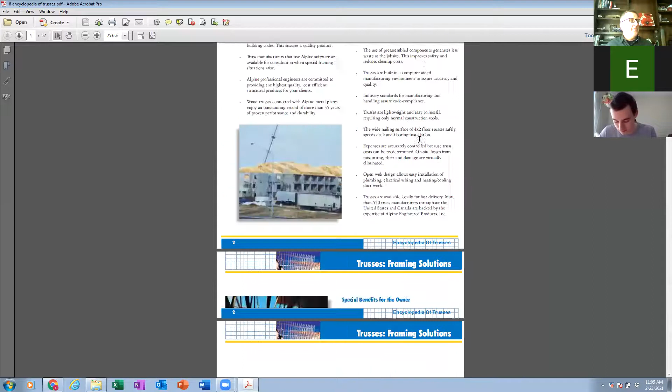I've mentioned a thousand times that I draw house plans, etc., and one of the things I'm doing a lot is speccing out trusses. I'm not an engineer, so I can't design the trusses, but I'd like you to understand exactly what that means. In My Open Math I actually posted this Encyclopedia of Trusses. It's a PDF document you can search yourself online and download. I'm not going to go into a ton of detail, which irritates the snot out of me because it's so dang cool, but I'd like you to at least look at this page, because it's kind of awesome.

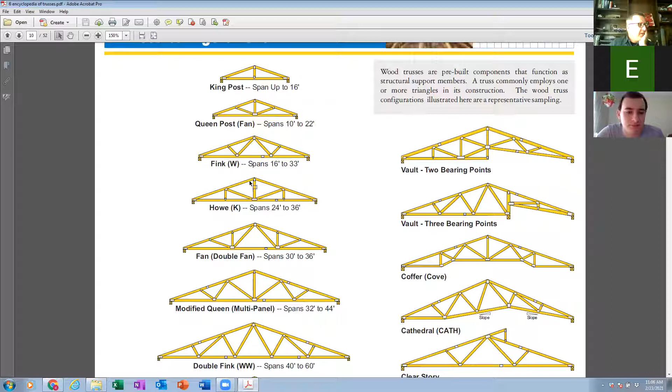So we're going to start looking at this today. And as I said before, the cool thing is you don't have to learn anything new—you already know this. We have to make the sum of the forces in X, Y, and the sum of the moments equal zero. But the brilliance of a truss—let's take a look at this Howe truss. And notice these names: Fink W truss—notice that makes sense, there's a W there. And a Howe K truss—maybe those look like a K somehow. I'm not seeing a K right now, but maybe there's a K right there. Fink and Howe—let's see, are there any other names here? I thought there were three.

There's one more I can't think of, but Fink and Howe were people who lived in this country. Back when bridges started, it was time to get serious, because people invented the iron horse, the train. Now if you're going to get one of those across a river, you're not just going to fell a tree and walk over it like they would with a wagon train—throw some sticks over a couple of trees and get the wagon across. You're going to have to get really serious about how to build a bridge if you want a train to be able to cross. These names were the last names of train engineers. I'd invite you, for some extra credit, since I haven't looked into it any more than what I just told you, to go investigate: who were these people, when did they live, and what they really did is come up with these web designs.

So I'd like you to understand a little more about trusses and what's in your book. Take a look at this—this one on the top right here, let me zoom in a little bit more.

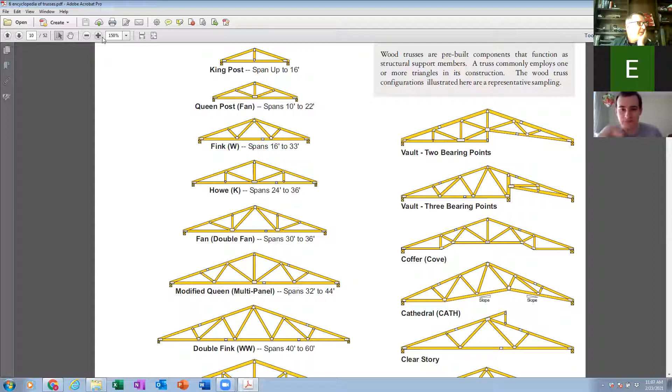This on the top right here is called the top chord. So those are two top chords. And then there's a bottom chord.

This is what you experience as the roof on the outside of the house, and this is what you experience as the ceiling on the inside. But what you never see is what's called the web inside this, which is just a bunch of sticks, and all together that actually supports the weight of the roof. It's just super brilliant.

You might notice there's a bunch of plates on here, and those are really cool. It's like a piece of metal that has teeth that push through it, so there's all these teeth sticking out. They lay them on both sides of the truss and just smash them in there with this huge roller. It's really cool how it holds these together.

The end result is these are engineered, and we're going to have a project about this a little bit later on. But what we want to talk about today is the forces that are acting on all these things, and try to understand it.

So, you tell me, what actually causes all the forces? Notice there's no arrows pointing at this saying 9 newtons or whatever. What causes there to be force on that roof? I'd like you to brainstorm with me a little bit here. Where do the forces come from that are acting on this—the arrows that your author is always adding to your pictures?

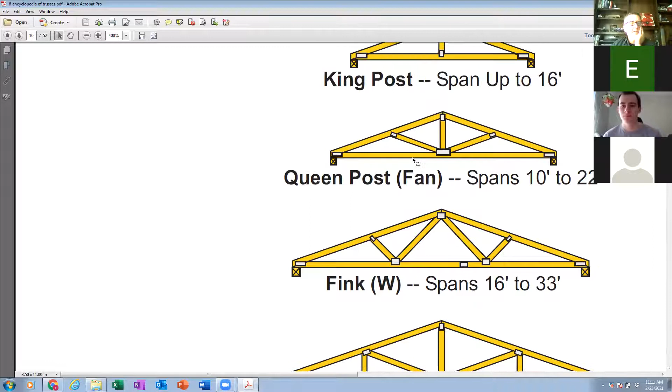So we're going to get into that, which again is beyond the scope of this class, but I just think it's so cool. I want you to understand this so you can be awesome in your future classes in engineering.

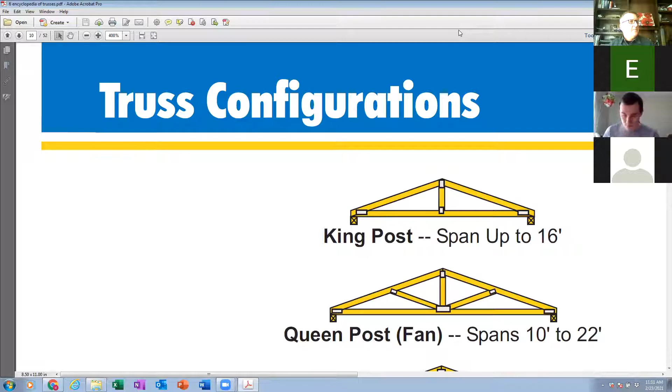But let's dig into this. So this is an encyclopedia of trusses. I posted it at My Open Math, so you can actually pull this up yourself and play around with it a little bit. We're going to spend all week talking about trusses, which I'm exceedingly excited about.

So I am going to bring up a book problem to start this with. As we go along, I will show you more and more practical examples that's a little bit more interesting than the book. But I first want to convince you that you actually already know this. This isn't actually hard.

So I'm bringing a new note in. The note is in. I'm sharing a screen now. And ba-bam, there we go. Your first reaction to this should be, I'm not afraid of that right now, because isn't that what we've been doing? You just got some structure with a bunch of arrows with weight on it.

Notice they're telling us here that P1 is 3 kilonewtons and P2 is 6 kilonewtons. Again, doesn't that feel very arbitrary? Like, where the heck is that coming from? What do you got, a 3,000 Newton bird on one place and 6 on the other?

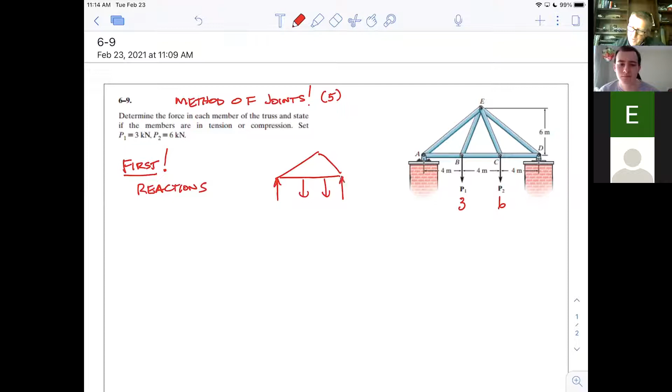The reactions at A and D - that has to be sitting on something, right? So isn't the block, the apparent stack of bricks, pushing up at A and also pushing up at D? Isn't that going to have force as well? That's what I mean - those are the reactions. We've got to find the reactions at A and D. We've got to figure those out first.

Now to do that, the cool thing is we're just going to fill this thing in - in other words, we're thinking of this as solid. It's not solid, that's the beauty of a truss. It doesn't cost as much money, we don't have to fill it full of metal. But we're going to treat it as solid.

And find those reactions. Now notice there's no horizontal forces on this particular truss because the weights are going straight down. By the way, that's really common on a truss because gravity is causing the action, so a lot of times you have no horizontal forces.

Again, you already know how to do this. So I'm just going to call this one the force at A and this one the force at D. And I'm just going to let the figure tell us that those are y coordinates only, and I'm going to throw in my 3 and my 6.

How are you going to find those reactions? What do you got to do? Is it the sum of the forces in y, the sum of the forces in x, or the sum of the moments? Somebody tell us. Probably sum of the moments, because we wouldn't have enough information with just the forces in y.

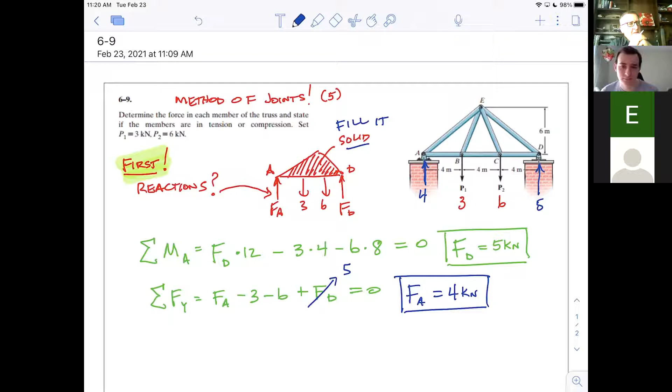Because now you know something that you didn't know before. So now we move on to second. I better write the word out since I wrote the word out before. Second.

Now we can move to the joints. The question is, which joint? Should I go A? Should I go E, B, C, D? Which one should I go to? There's a right answer to that question. Super important question. Which one first?

E is terrible. Why is E a terrible choice? E is the worst choice you could possibly make. We don't know anything in E. You know nothing, like none of the forces are on it. Does that make sense? You know nothing about E. Don't go there. E is terrible.

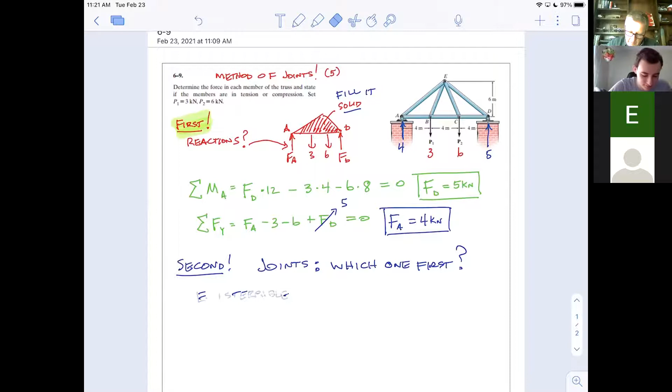What about A? Is A good? The answer is yes. Now you need to think A is not the only good choice here. D is the same good choice. But you have to think, am I going to write an equation with vertical forces or horizontal forces? That's the thing you got to think about.

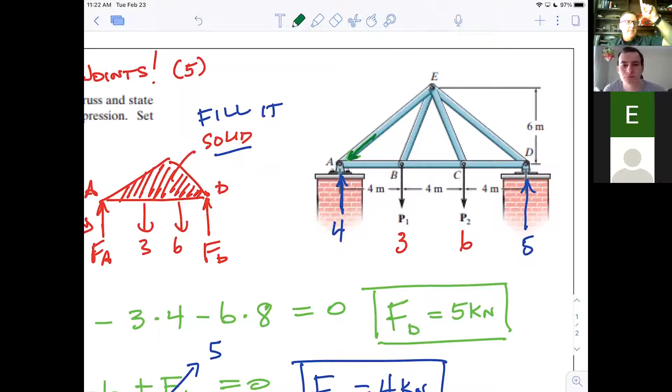Do you agree that AE is the only member that can push back against this? Would you agree that the 4 down there makes joint A want to go up right now? A is being pushed on vertically by 4. Based on the free body diagram, if you push on A by 4, then A is going up in the air. We can't have that, right? That's our job as engineers in statics. We can't have that, that thing can't go up. So the only member that can fix it is AE. Do you agree this member can't help with vertical because it only pushes horizontally? Now there's 2 members I don't know here. I don't know the force on either one, but AE is the only one that's going to fix the vertical problem. Do you see what I'm saying?

For that reason, would you agree I could start here as well? Notice, because this is pulling down, would you agree this has to pull up? I'm trying to get each joint not to move, that's the method of joints. You just look at one joint at a time and say, what forces do I have to assign to these members so that none of the joints move? If I can get all 5 of these joints not to move, congratulations, the bridge doesn't move. So actually I could start at A, B, C, or D here. Any of those would be fine. Sometimes there's less choices than that, but you got to be a little creative with this stuff.

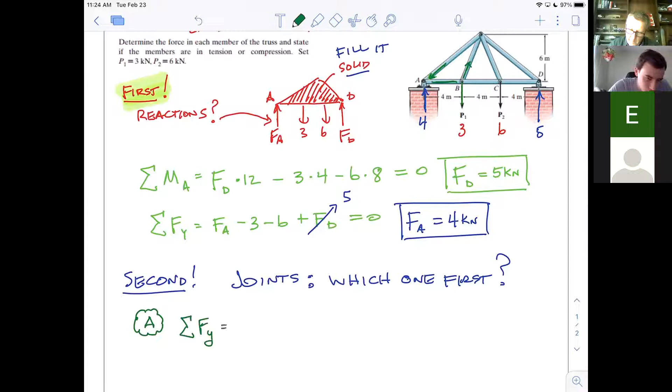So let's start at A. And you might get organized, might do something like say, I'm going to look at A, get A not to move, that's the first joint I'm going to look at. Now I'm going to write a bunch of equations and do a bunch of math. The only thing I can really do there is say I'd like the sum of the forces in Y to be 0, and I have 4 going up. And then, what am I going to call that? What would you call that? Do I call it AE? Do I give it a new name, like call it 1, 2, 3, 4, 5? I've got 7 members, do I name them 1 through 7? I don't know. I'm going to call it AE.

I don't want to relabel it, so I'm just going to call it AE, EA. I don't care which. Why is this not true right now? What's wrong with that statement?

It only affects the Y portion of AE. Yeah, that's pushing at an angle, so that's all that member can do. Does that make sense? It's pushing at an angle, but like we've been doing for a long time now, you've got to convert that to vertical. AE is not pushing vertically, so you've got to multiply it by its ratio, or sine of an angle, or something like that.

And then not only that, but isn't it down? Like it's negative, right? Isn't it pointing down? Do you see how I added that arrow? That's actually really important, come in and draw the arrow. It obviously has to point down, otherwise A is going to move up. It has to point down.

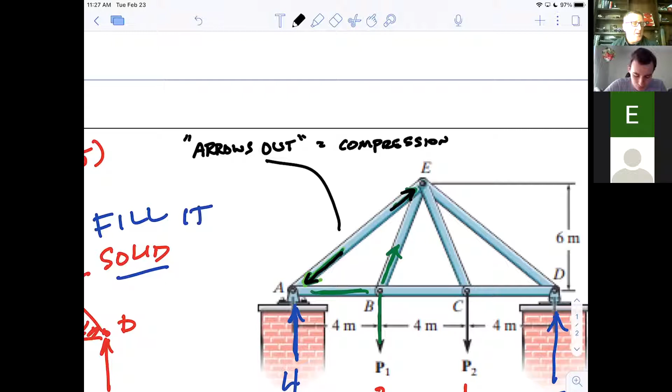So what's the modifier to get this thing to be vertical? Well, you've got to pay close attention to get this from the dimensions. But what angle is that pipe at? Isn't it a vertical of 6 meters, thanks to that number over there? But look at its horizontal—isn't its horizontal going from here all the way to the center? So that'd be 4 plus half of 4, which is 6. So that thing is actually at a 45-degree angle.

So you could say, oh, 45 degrees, I'm going to use 45 degrees, times the cosine of 45 degrees. I'm going to use the lengths and just let them do the work. So this would be the square root of 72, the hypotenuse would be.

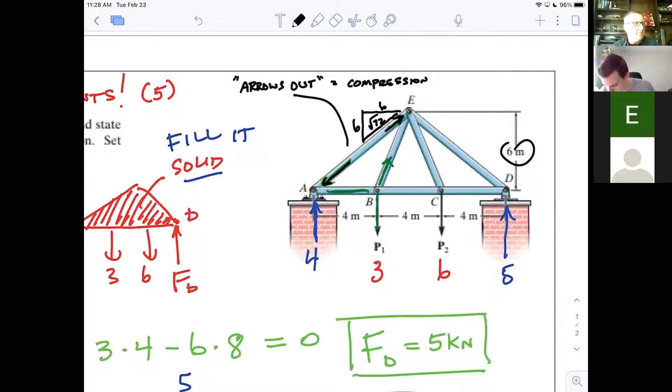So what's the modification for vertical then in my formula? I'd be multiplying that by 6 vertically over the square root of 72. And that's it, that's the only two pipes that can contribute vertically. Therefore, those two working together better equal 0. Again, I would ask you, please immediately interrupt and let's have discussions.

So let's see, if I solve this, I'm really adding force of AE times 6 over square root of 72 to both sides, and then I'm multiplying 4 by the square root of 72. And then I'm dividing that by 6, and so I'm getting force of AE is 5.66 kilonewtons of compression.

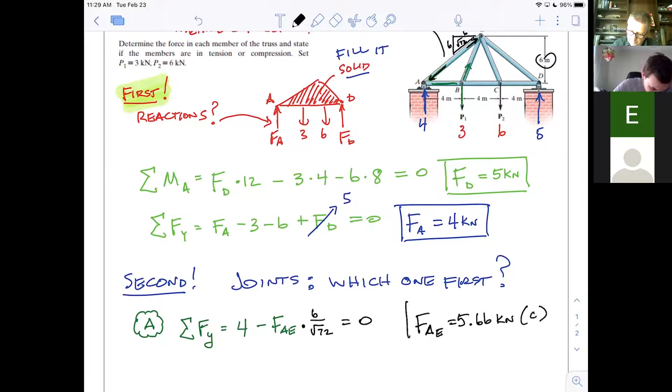Do you understand why it's bigger? Why is it bigger than 4? You might have thought it'd be 4. Well, it's just not pushing at a very efficient angle, right? The worse angle you push at, the harder you're going to have to push. So by pushing at 5.7 kilonewtons at an angle, that's achieving 4 vertically.

So, think carefully here. Is A now static? Is A not moving? Have we achieved it?

Landon, what do you think? Have we achieved it? Is A now static? It's okay to say you don't know, or to make a hypothesis. I think, but I'm not sure. What do you think?

Well, I'm kind of trying to divorce the simplified model from the other stuff that I know needs to be going on. So let me think.

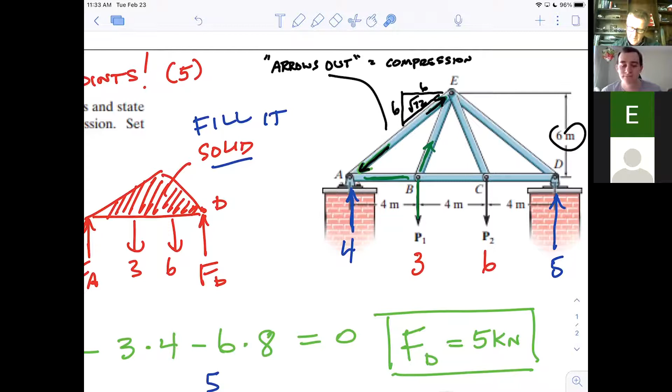There's only one thing: this member pulling back to the right. You agree with that?

What you see with these problems is kind of a domino effect. You start at one joint and it creates this domino effect. And so member AB is going to actually have to pull back. Remember, just like my arms, if you pull with one arm, then you're automatically pulling with the other one too, which means there's also an arrow on this side that's pulling that way as a result.

Again, this is what the beam is having to do, not what is being done to the beam or the member, but what it's having to do in response. So notice those arrows in. In other words, here's the beam sitting here and it's having to pull in to keep this from happening, right? Well, why is it pulling in? Because it's being tensioned, it's being stretched out. So if you have arrows in, that is tension.

So that's huge. Again, I'm teaching you what I consider to be the easiest way to think about this stuff. And this is not the way the book teaches it. I can totally watch this stuff happening.

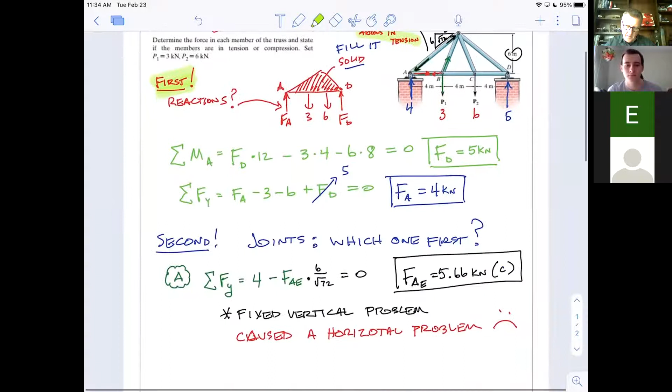Okay, well, let's go do that. Is joint A not moving? Well, not vertically, but it is moving horizontally. So we got to keep going here.

So what's the sum of the forces in X? I need that to be 0. Well, how hard is that pushing left?

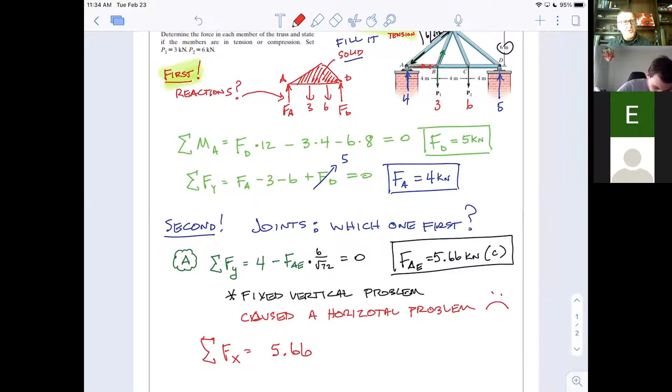Well, I think I'll just write it this way this time. I have that 5.66, but again, that's the angled version of that force. And I've got to modify it according to this horizontal. And again, I hope this seems familiar to you, but according to the horizontal, what horizontal component is it going to be? Well, the horizontal and vertical are equal. And by the way, now I'll go ahead and write this.

So that's going to have to be modified by 6 over the square root of 72. Now I'm going to type that in my calculator really quick: 5.66 times 6 divided by the square root of 72. That whole thing just came out 4.

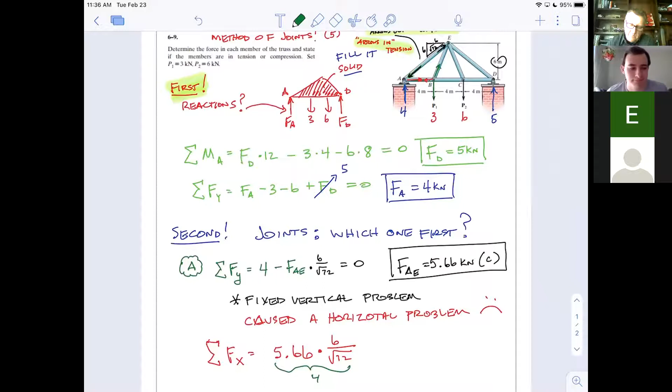Look at the picture. Why did that come out 4? Because we have like the bricks pushing up, the force going up, from the ground up. And therefore, wouldn't that member AE have to be also pushing down with 4? So 5.66 at an angle must be 4 modified to vertical, right? And since these two numbers were identical up here, then that means the horizontal would be 4 too. So in a sense, that's not a surprise. I wouldn't necessarily notice that, but it's like, oh yeah, I guess that makes sense.

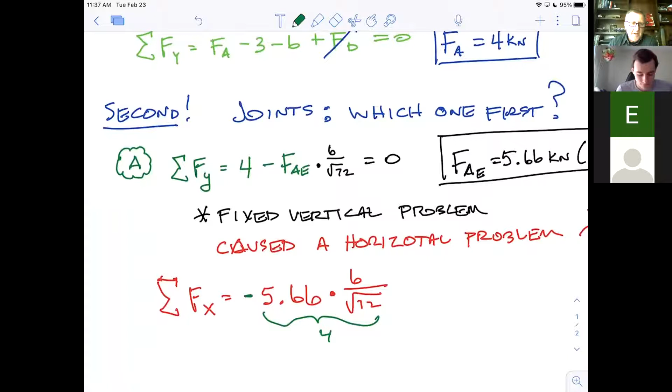So what's going to stop that? Now notice again, that's actually going left. And so I should go back here and throw a negative sign in front of this, shouldn't I? Because my arrow is pushing left. So that's actually negative. Well, according to our picture, isn't AB pulling back to the right?

And notice that thing's horizontal, which means I don't even have to modify it. It's horizontal right now. I don't have to multiply it by anything. So AB is pulling back to the right. So no modification. So plus force of AB needs to be 0. So that means the force of AB is just 4 kilonewtons. And very important, tension.

We've ignored the entire rest of this bridge, this truss, but now joint A is static. So we're done. We can move on to something else.

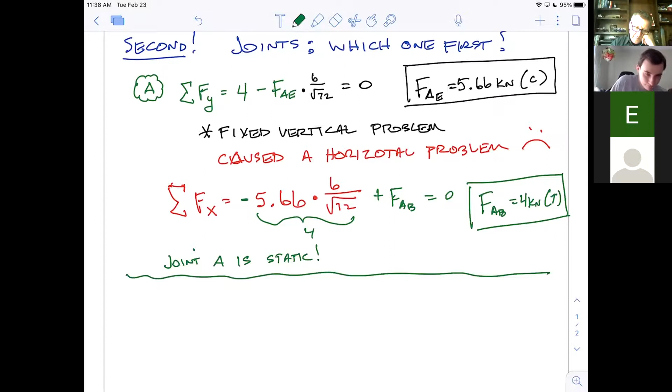Remember what that means. It just means that it's static if you choose a bar, a member AB, that's strong enough not to rip in half with 4,000 newtons pulling on it. Do you understand that? Could I put a piece of string there and it rips in half? Yeah, you have to choose a bar that's capable of this. You understand the logic to that? Just assigning a force to it is not the point. It's saying this is how much force is going to be required of it in order to stay static. And so we better go choose something that can do it.

Last night I moved a piano with my son-in-law and future son-in-law. Well, we invited people that can lift pianos. Does that make sense? There's pianos to be lifted. We did not invite my 1-year-old grandson. He was not invited to help.

So you got to invite members to this truss that can actually do the work that we just figured out is required of them. What joint should we move to?

Now, what I want you to see is, do you see the domino effect? As a result of this member needing to pull to the right with 4 kilonewtons, does it make sense the right hand is also pulling 4 kilonewtons as well? Which means all of a sudden joint B is being pulled to the left as a result of this. Again, think about it. This makes perfect sense. If this is pushing on this, and this whole brick wants to tip over, then isn't that going to pull on this, which in turn is going to pull on this? So of course that joint is going to get pulled to the left too, as a result. That's the idea.

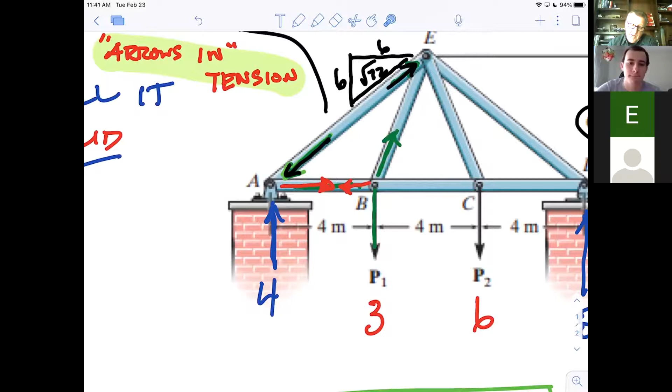Again, I don't want to go to E yet. Even though I now know something, keep in mind, I know that this is pushing with 5.66 now. That's why I like to draw the arrows this way, because what we just discovered is E is being pushed in this direction, 5.66 now. So I know one of them, but I still have 3 that I don't know. So I don't want to go to E yet.

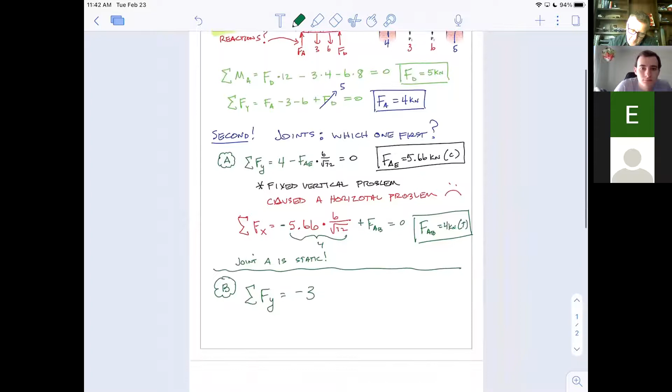So let's move to B and do the sum of the forces in Y. And as I said before, we could have moved here in this particular problem, we could have moved there first. So I've got 3 going down. That's super easy. And then I've got the force of EB going up. So it's positive, force of EB going up. And again, why is it going up? Because it's the only one that can. That's why it's important to come back here and draw this arrow in.

Which means there's a mirror image of it coming up here. Isn't that interesting? This bar here was in compression, but this bar is actually in tension. Isn't that cool? When you first looked at this, you just thought all the bars are working, but some of them are being smashed and some are being stretched. Until you wade into the method of joints, you can't actually tell. So that's kind of cool.

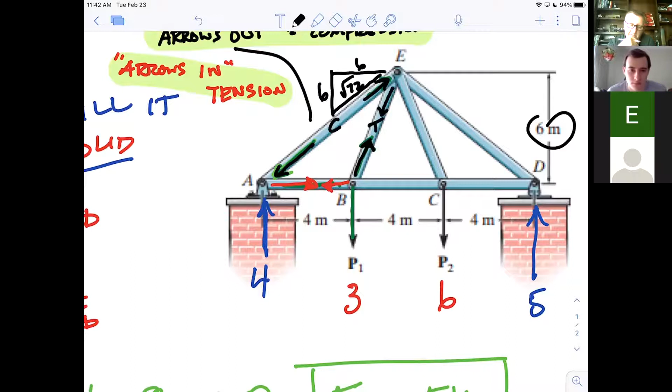But again, I got to modify this, right? What angle is this thing at? It has a vertical of 6, but its horizontal is only 2. And 36 and 4 is 40, so that hypotenuse right there is the square root of 40. Whew, that's terrible, I got to do that again somehow. I'm not sure what to do with that. It's so small, I guess I'll draw an arrow.

By the way, could you agree with me that if I redrew a nice, huge free body diagram at the top of my page and made it gigantic, that would be nice? That'd make it a lot better. I have a free body diagram here in a sense, but it would be much better if I had redrawn this.

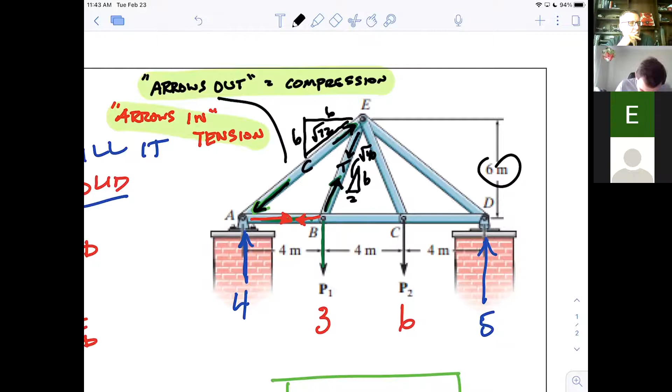So what modification then does that force of EB need if I want it to be vertical only? Do you agree it's 6, which is vertical, over the square root of 40? That's the proportion of it that's vertical.

Again, you're more than welcome to come up with this angle right here. Do inverse tangent of 6 over 2 and come up with that angle if you want, and use sines and cosines. But sines and cosines are ratios anyway. In other words, I'd be using the sine of this angle, which is opposite over hypotenuse. I already have the opposite on hypotenuse, so why not just write it down? So that's got to be multiplied by 6 over the square root of 40. Again, that's not new, I hope you agree with that, but I would invite you to interrupt.

So that's its modifier. Those are the only two members that can contend with the vertical desire that joint B has to move. And so I can say good, and then that's equal to 0. If I solve that by adding 3 to both sides, then multiplying by the square root of 40, and then dividing by 6, I get 3.16 for force of EB.

And because it was arrows out, that's... I'm sorry, I said it backwards. Because that was arrows in, that's tension.

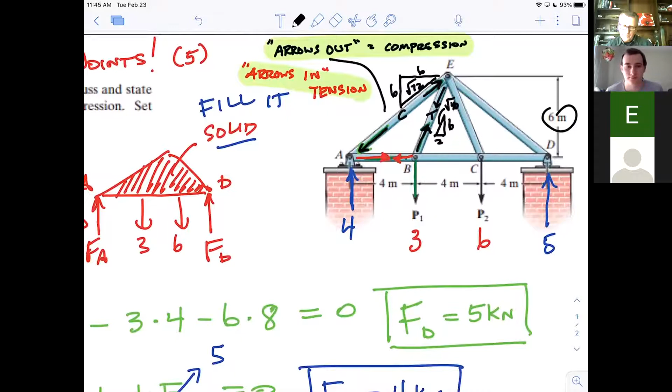As before, you should not be surprised. This is a little bigger than 3, but notice it's not much bigger than 3 because that was almost pulling vertical. If it was pulling vertical, it would have been 3. If you tilt it a little bit, it'll be a hair more than 3. If you tilt it way over, it'll be a lot more. That's why this first one, although it was 4, this is tilted way over, so it had to pull way harder than 4, or push way harder than 4 to fix the problem. So this didn't have to pull near as hard because it wasn't at such a steep angle. So you should not be surprised that that's bigger than 3, but not way bigger. If you got something like 5 for that, you should say something doesn't seem right there.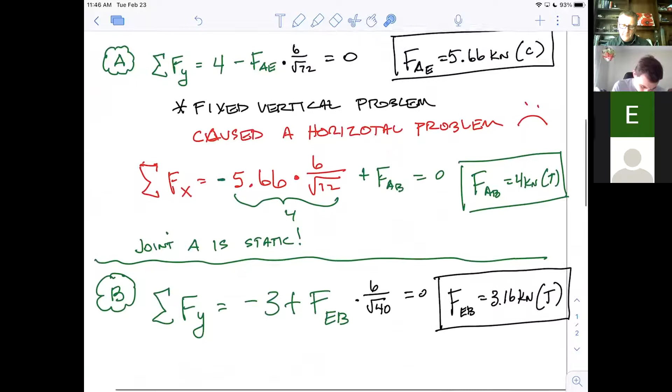Domino effect. Does it make sense that now we could move on to fix the horizontal problem?

Now, this is interesting. If I look at this joint, I see this is pulling to the right and this is pulling to the left. And so I'm not really sure what BC is going to do. Do you agree with me there? I actually, for the first time, I don't know what way to draw this arrow. I'm actually not sure.

Let's see, well, maybe I am. Let's reason about this a little more. How hard was this pulling to the left? Force of AB, it was 4, right? It was 4, so who's going to win? This is pulling to the left at 4, and this is pulling, well, not very much to the right. Would you agree with that? It's not pulling very hard to the right. So can you see who's winning that tug of war based on logic? 4 is pulling way harder to the left. And so you can guess at this, and that's fine.

What's going to happen if you guess wrong? You get everything else wrong. No, if you guess wrong, you just get a negative number. In other words, if I come in here and say I think this is going to push this way, and therefore I'm going to call that negative because I just aimed it left, and then I get all done solving it, and then I get that force of BC is -2, then it's like, oh, idiot, you drew it the wrong direction. And I want you to understand that in this case, you could actually reason it out and be correct. I've got it right here, but many times with trusses, they're really confusing.

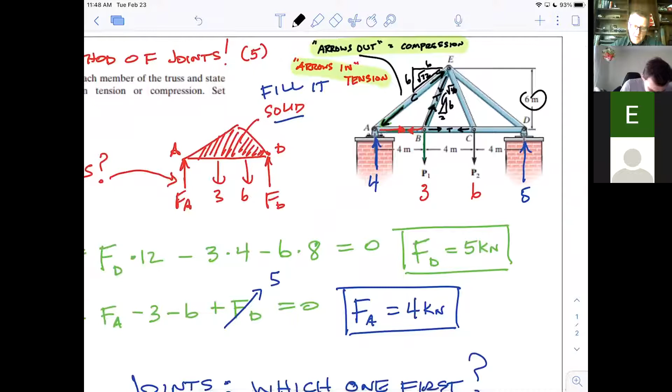Basically what you're doing is taking every joint and fixing it vertically and horizontally. So let's fix that joint horizontally. What would the sum of the forces in X be? Well, I had 4 pulling to the left. I had 3.16 that we just figured out, pulling to the right. But remember, that wasn't pulling to the right, that was pulling up at some weird angle. So what's the modifier?

You tell me, Evald, you're up. What's the modifier that I have to multiply? Times 2 over square root of 40. Exactly. Times the horizontal component, 2 over square root of 40. You guys are on this. So cool, times 2 over the square root of 40.

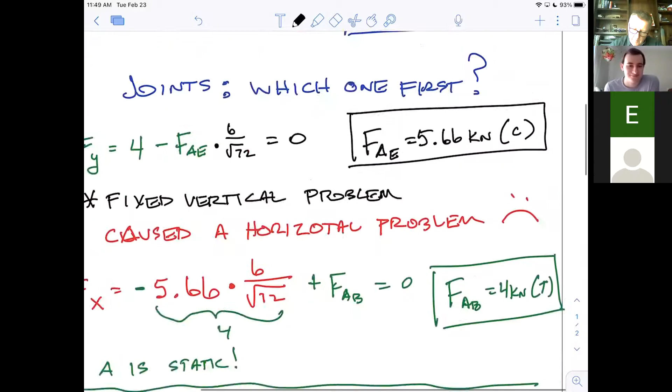Am I done? Is that all the forces? I hope not, because there's no letters there. We're done. What else is missing? Oh yeah, that one other arrow we're working on right here. This guy right here, force of BC, which I'm saying is positive, at least relative to B. Notice when I come over here to C, it's going to be negative, because this is Newton's law: for every action, there's an equal and opposite reaction. If you pull left with one hand, you have to pull right with the other. So that's positive to the right, and it's already horizontal, awesome, that means I don't have to modify it by anything.

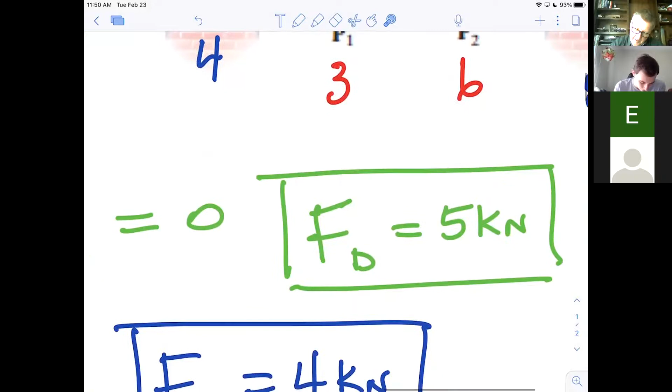So I can just say 4 plus force BC, and that's got to be 0. All I gotta do is add 4 to the other side and then subtract 3.16 times 2 divided by the square root of 40. And I got a positive 3. I got 3 exactly, that's kind of weird. Force of B, I got 3 kilonewtons. And because it was arrows in, it's tension. So I was right, it was positive, so that means I guessed right.

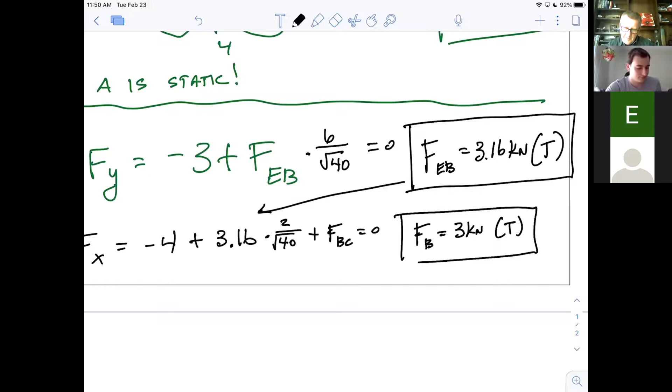But is 3 a coincidence? It came out exactly 3. I find myself wanting to say no, but actually I don't know. Actually, I don't think it's obvious. It's not just because this is 3, because that was vertical, right? So if this is 4 to the left and this is 3 to the right, then this one's horizontal component must have been exactly 1, I guess. But we didn't know that, did we? So I don't want to play with that, but that's what must have happened. Yeah, if you use exact square roots, you can kind of see it. Good job, Place, but of course that won't always be the case. Yeah, that was just kind of lucky here, if you will.

Now, one thing I want to point out: if this truss had been symmetrical, which is true on a real house, does it make sense these two reactions would be equal? Because you have an evenly distributed load, which is what we'll talk about after this chapter - like what is a snow load over the whole thing, not just one arrow but a whole bunch of arrows. If that was distributed evenly, does it make sense these would both be 5, and these would be the same, and these members would all have the same answers and we're done? But in our case, it wasn't - it was loaded asymmetrically. So we actually have to keep going, we've got to find them all.

But notice we're making good progress. 1, 2, 3, 4 - we found 4 of the 7 right now. We're doing awesome. Where should I go next?

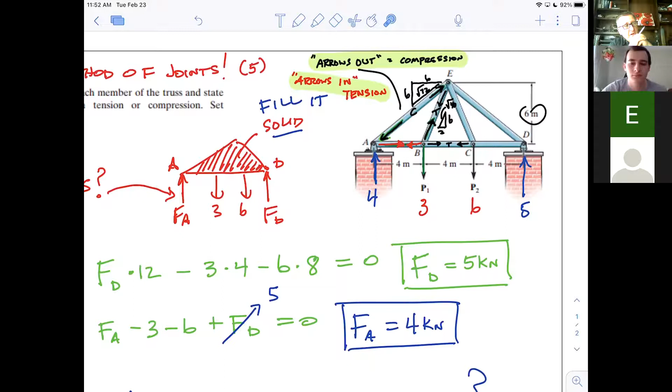C or D would work. As I said before, this is an unusually simple truss in the sense that we could have gone to D from the very start because it's just like A was. It only has two pipes pushing on it. But we're progressing across the truss, so let's just go to C next. We could go to C or D.

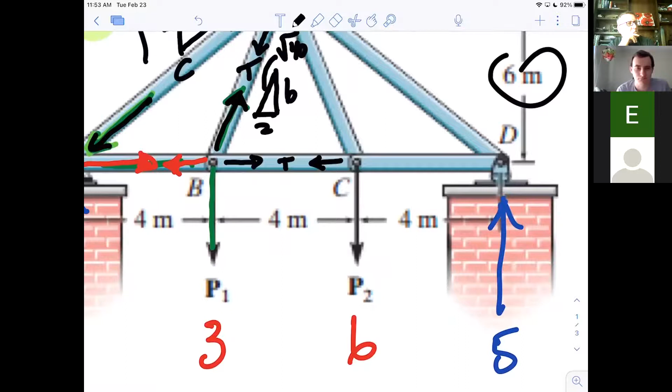So let's go to C next. Landon, do I want to do force of X or force of Y first? It's okay to be wrong. Force of Y then, I suppose.

You are correct. Why is that? Because this member has no contribution in Y, since it's perfectly horizontal, which means this member here is the only one that can stop that 6 right there.

Now we just figured out a second ago that this force right here is 3, right? It's pulling left 3, but would you agree this one can pull back and that one can pull back? So both of these are going to stop the 3.

I don't want to do the sum of the forces in X first. The interesting thing is I could have done this a long time ago, because even though this force is 3 right here, it's making no contribution vertically anyway, so who cares as far as the forces of Y are concerned.

So that's force of EC. Let's go figure this out. So I've got 6 pulling down.

So the sum of the forces in Y, I've got 6 pulling down, and I've got the force of EC pulling up. Notice I didn't draw that in, but I said up. But if I go back and look at this picture, since 6 is pulling down, then this has to pull up, which means it's doing the same thing on the top end, which means it's in tension again.

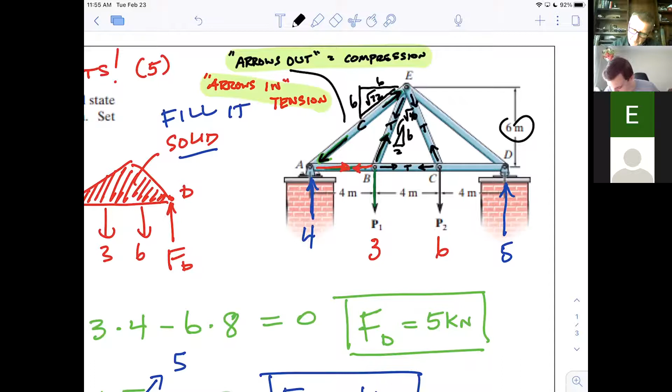Notice that member is at exactly the same angle as EB was. So the same triangle, 2, 6, and the square root of 40 applies to the direction or the angle that one's pulling at. Do you agree with that? So its vertical component is 6 over the square root of 40. That's my modification of it. I can't just say it's pulling vertically, I've got to say it is if you modify it by 6 over the square root of 40.

That's the only member pulling or pushing on it, so I can set that equal to 0. If I add 6 to the other side, multiply by the square root of 40, and then divide by 6, I get 6.32. That's interesting. So force of EC is approximately 6.32 kilonewtons, and because it was arrows in, that's tension.

Notice, just to stare at our answers so far, does it make sense? That's the hardest working bar of the entire bridge right now. This bar down here was only 3.16. This was only 3. This one's got to work twice as hard, strong enough to lift twice the weight the other ones are. So that's interesting - that's why you got to know all of these.

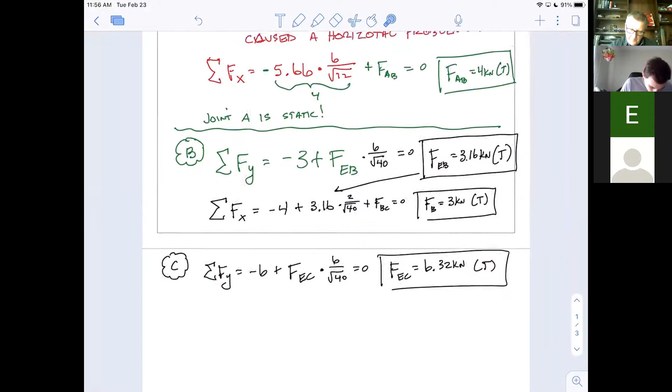Now that we know that, we could actually proceed to the sum of the forces in X. I'm going to do this wrong on purpose, and I'm going to look at this time without thinking so much, and just guess and say I think this is pushing to the left.

I've just had enough practice that I know that's not true, and I'll tell you why really quick. I'll erase this, but if you have a beam right here, that's the bottom of your truss, and it's being supported on both sides like this. Is that beam, when it sags down, getting longer or shorter? If it's sagging like that, is it getting longer - tension - or is it getting shorter?

Depends on which part. The whole thing, under its own weight, even if there's no forces on it, its own weight is going to cause it to sag in this way. Do you agree with that? It's going to kind of sag down. Do you agree it's getting longer then? Yes. And if it's getting longer, then it's being pulled on, which means it's under tension. The bottom chord of a truss is always under tension.

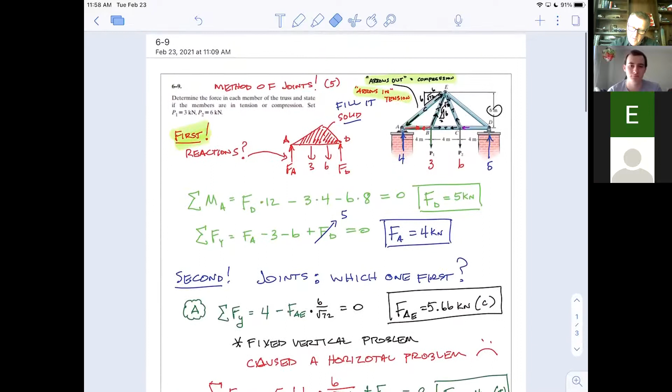So that's why, even though I haven't considered the forces, I know that I drew that purple arrow in the wrong direction. But let's just go ahead and do it anyway, and we'll see it come out negative, and then we'll fix it, okay?

So we've got BC pulling left here, which I got to go look up. And then I've got this 6.32, which I got to modify. And then I've got this pushing left as well. Notice in this case, that's idiotic to put the arrow in there the way I put it. Do you agree? Because these are both pulling left. There's no way this one is going to pull left too.

Having said that, I'm going to change my mind, and I should never pick that answer here. That's stupid. At least last time it was a toss-up. This time it's not a toss-up.

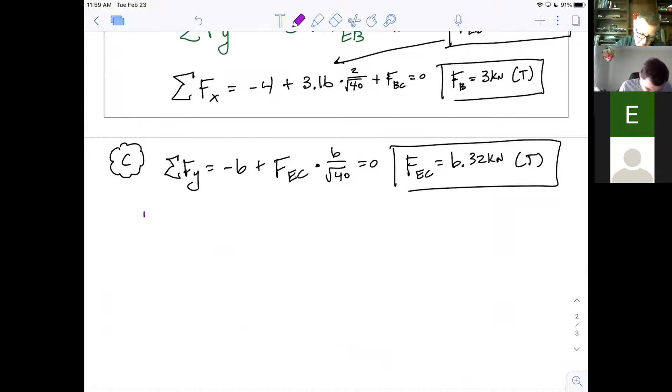Okay, so I've got BC pulling left for the sum of the forces in X. We said Force BC was 3, so that's pulling left 3. We just figured out that EC was also pulling left, that's 6.32. But to modify it, as Evold said, we've got to multiply by 2 over the square root of 40. That's pulling left. So duh, those are both pulling left.

Well, then certainly this next one's going to have to be a plus sign, pulling right. Unfortunately, again, it's attached horizontally. So that's CD, remember CD, that's pulling right. And I don't even have to modify it by anything. It's very exciting.

So if I add those to the other side, add 3 to the other side, add 6.32 to the other side, multiplied by 2, divided by the square root of 40, I get 4.998. That's interesting, it basically came out 5. So the force of CD came out 5 kilonewtons.

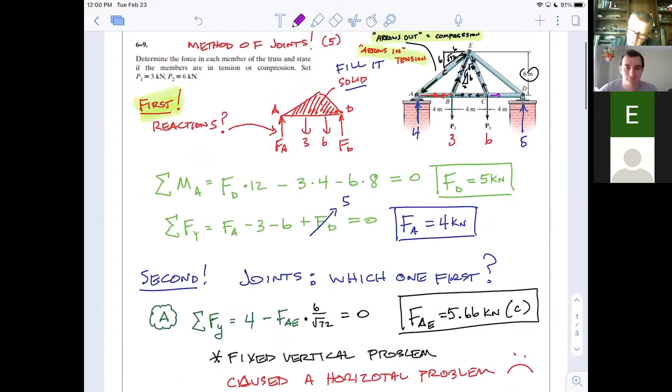And because it is, as I said before, arrows in, that's tension. So I need that in my answer: tension. Again, I'm kind of wondering, wow, that's interesting, it came out 5. It just seems like, what's causing that?

Okay, we have 6 of our 7 members calculated. We got them all except for one last one. So I'm going to move to, well, what joint should I move to? Does it make sense? You now know this member, this member, this member, you know all 3 of those, but just not that one.

Therefore, you could move to E right now. But I find myself going, wow, there's 3 of them, I don't want to mess with that one. This one's only got 2, that looks easier, I'm going to go to that one instead. But you could go to either one now. So you can go to E now for the first time. Well, you could have done it a second ago because we knew these a second ago. But let's go to D and let's just take care of the 5.

Let's do a sum of the forces in Y. But would you also agree that because I know the left answer here, I could do the sum of the forces in X too? I could do either one in this problem.

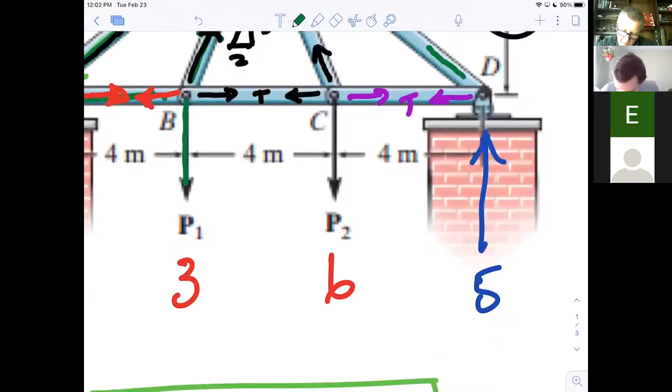D, I'm going to do the sum of the forces in Y. I know that I've got 5 pulling or pushing up, the reaction of the rock, 5 pushing up, and therefore in my drawing I'm going to have this member pushing down against that. And it has the same exact right triangle that we just had a second ago, where this is 6 and this is 6 and this is the square root of 72.

So its vertical component would be 6 over the square root of 72. So that's the force of ED. So force of ED is actually pulling down, pushing down, but it needs to be modified by 6 over the square root of 72, and that's it. That's the only 2 things that are vertical. Therefore, I can set that equal to 0.

So if I do that, I end up with 7.07 force of ED. We have a new record, my friends, 7.07 kilonewtons. We have a new hardest working member of the truss. And because it's arrows out, it's back under compression again.

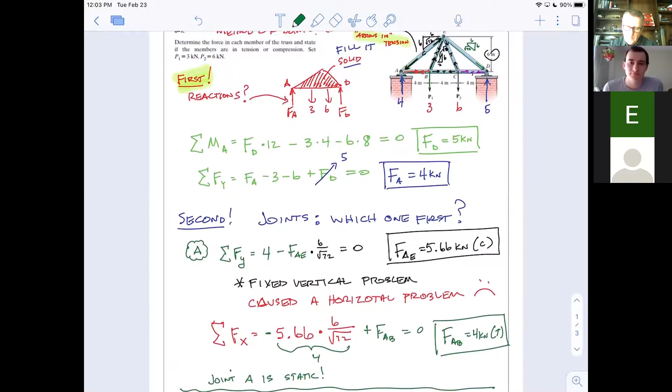So that's by far the hardest working member of the entire truss. Again, it is arrows out, so it's compression.

Now I suddenly realize, hey, I'm done. But I never even went to E. Isn't that weird? I never went to E. And not only that, we never did a sum of the forces at D in the X direction. And so I'm going, uh-oh, man, I hope those are 0 because I never even touched them. You understand that?

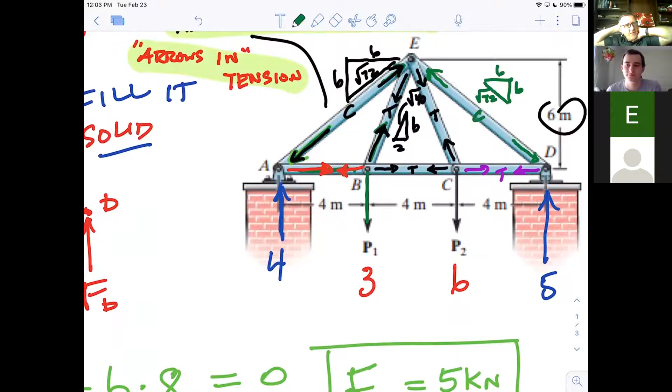So let's check our work. I mean, we are, after all, going to build a bridge here that hundreds of people go over the top of, and we don't want anyone to die. So let's not just quit because we're lazy. So I'm going to make up a section here.

Let's check our work because we're done. We found all the members. But let's make sure that at point D, the sum of the forces in X is actually equal to 0. I'm putting a question mark. If I don't get the answer to this to be yes, I'm in a world of hurt. Do you understand that? Because I've been doing math for 45 minutes right now. That just means something I did is wrong. I don't know what - hopefully it wasn't the original problem. Like if the very first one was wrong, then the domino effect means everything I did after is wrong. So I'm really hoping the answer to this is 0.

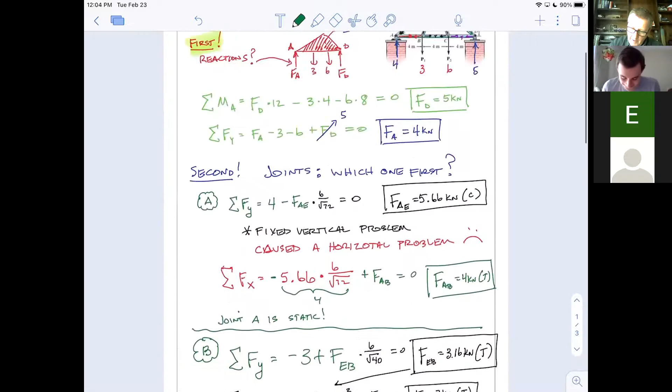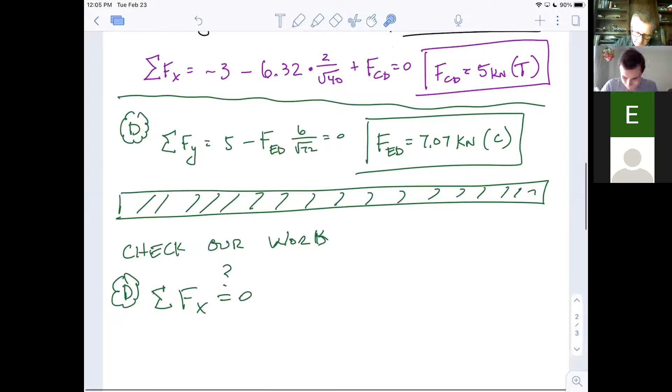Oh my God. So let's see, what do I have there? I've got the force of CD, which is pulling to the left, and the force of ED pushing to the right. Since I know numbers for both of those now, I'm hoping those add up to 0. CD was pulling to the left 5. I'm going to write those in just because it looks confusing - if I just write numbers here, you might not know what I mean. So we had force of CD, which was pulling to the left, and force of ED, which was pushing to the right. That's what we had. So what were those? CD was 5, so it was 5 to the left. ED we said was 7.07.

But to get its horizontal component, I have to multiply by 6 over the square root of 72. So I'm basically just sitting here really hoping, as I type that into my calculator, -5 plus 7.07 times 6 divided by the square root of 72. I'm hoping I get 0. I got -7.55.

But then way out to the right it says e to the -4. That's what my calculator said. Do you understand what that means? It means -0.000755 - move the decimal point. Scientific notation for the decimal point's actually 4 places to the left of this. Do you understand you're not going to get 0 for this? Why aren't you going to get 0? If you did any amount of rounding - yeah, we've been rounding the whole time - you should expect to get close to 0, and I did. So I'm breathing a huge sigh of relief right now because it means all those joints don't move, they're static.

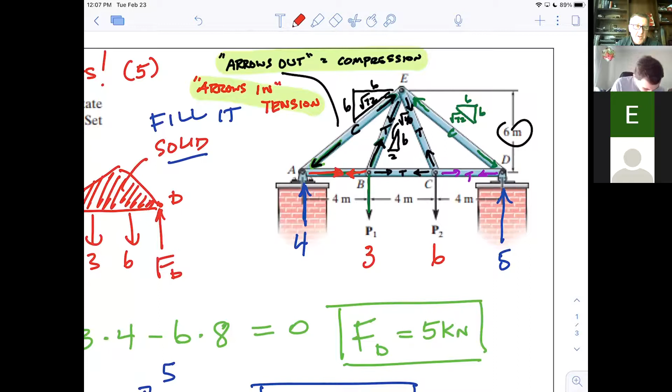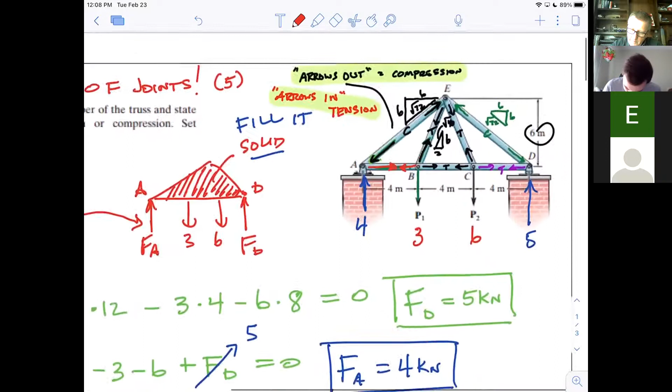You see what I'm saying? If I know I didn't screw up, I don't have to check this because it's impossible - if A, B, C, D are not moving, neither is E. But I might have screwed up, so that's why I'm checking my work. Let's see, I'm going to have to go back and forth a whole bunch here because I can't look at all this at one time - it's too small on my screen. I'm going to try rotating it, that'll probably make it a little better. It actually did make it better.

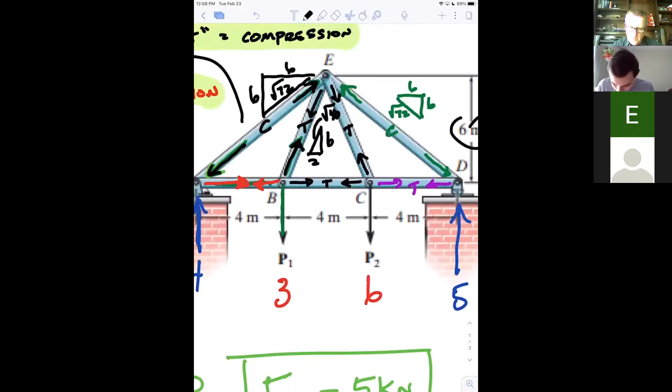So let's see, I'm going to do Y first. Switching to black because I'm in mourning right now. Sum of the forces in Y - let's see what we get for this. Well, we got force of AE - notice it's positive, it's pushing up. Do you see why the arrows are so cool? Force of AE on the left is pushing up, so I'm going to call that positive since I'm talking about forces in Y. Just so you can look back at your notes later and learn from this, I'm going to say force of AE, which is positive, and then I've got to modify that by its vertical component, which is 6 over the square root of 72.

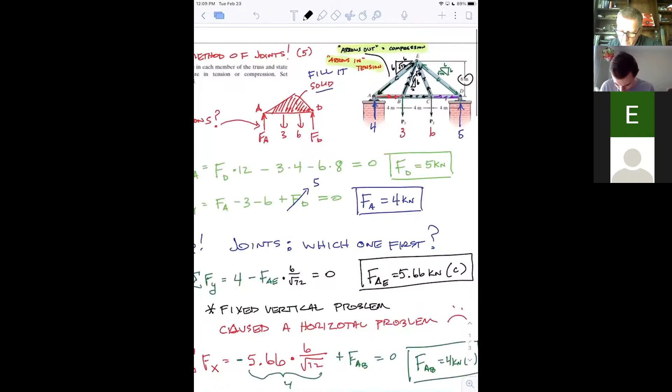And then the next one over is actually pulling down. BE is pulling down, so it's negative - minus force of BE pulling down. But its vertical component is 6 over the square root of 40.

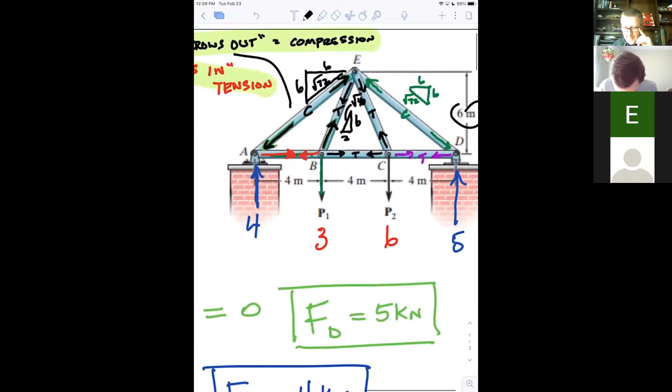And then the next one over, EC is also pulling down, so it's also negative. Minus force of EC is negative, and its vertical component is also 6 over the square root of 40.

And finally, got the last force on the other side, which is pushing up. Its arrow is up. Do you see why I was really careful when I drew one arrow to jump to the other side of the member and draw the other arrow in immediately? Because now I'm looking up here and I know where all those are going. The arrows are either both out or both in. They're never one out and one in. That's impossible.

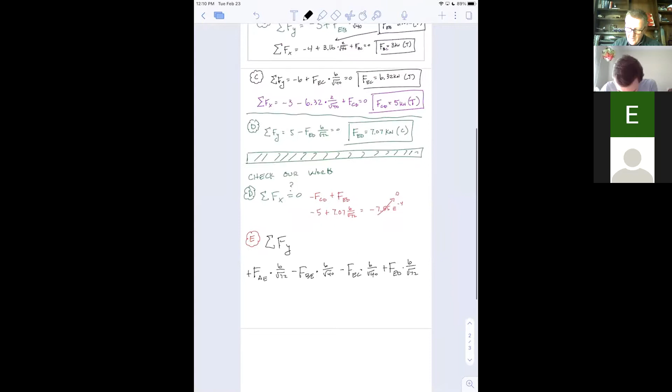So ED is also pushing up. So plus the force of ED, and it's modified by 6 over the square root of 72. And again, I'm hoping that this is 0 because I already found all these forces. So let's go back and write them in.

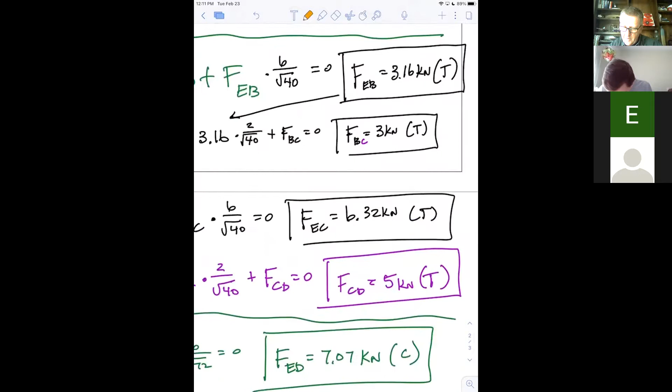What was force AE? Force of AE was 5.66. So in orange, 5.66. What was force of BE? Notice it's really important to carefully check, because I'm not even looking up at the drawing. There's EB right there, 3.16. Notice I drew it backwards. It's BE and EB, 3.16.

And then what's the force of EC? There it is, 6.32. And then finally ED, which I found last, which is 7.07. So basically, I'm sitting here sure hoping this whole mess is equal to 0. So I typed that whole thing in.

Whew, I'm stressed. 5.66 times 6 divided by square root of 72. Again, I don't really have to check this because I already know this works, but I'm just giving you time to think. Times 6 divided by the square root of 40. I love graphing calculators because you can type the whole thing in and see it and make sure you didn't miss any numbers. Minus 6.32 times 6 divided by the square root of 40.

Oh, man. Minus 6.32 times 6 divided by the square root of 40, plus 7.07 times this, 6 divided by the square root of 72. And again, I'm not expecting this to be 0, but I'm hoping it's darn close. And I got 0.0079. Woo!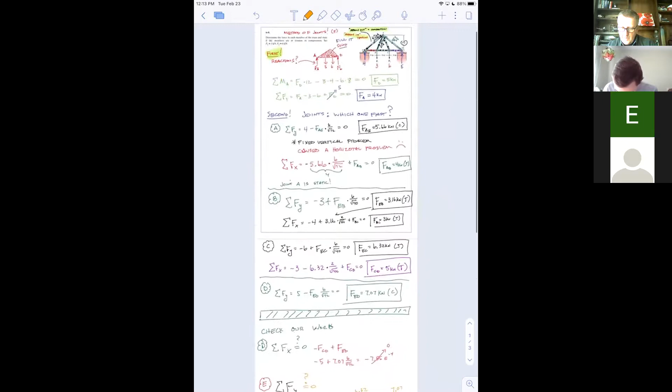This is the beauty of a truss, because what a truss is saying is, hey, we got to lift a lot of weight here, but it's expensive to fill something solid. So could we just put a few sticks inside there and carry the whole thing? Trusses are just utterly beautiful.

Again, I want this class to ruin your life. When you go into big stores like Walmart from now on, look up. Usually you'll still see the trusses up there because they're kind of expensive to cover up. And so a lot of bigger buildings, you'll see the trusses. You won't see them in a house because they're ugly, and you've got to have insulation. So they'll put sheetrock up there and you can't see anything that's up there.

But these are just beautiful. I mean, I love these, especially train trusses. There's one in Gold Hill, and the tower crane we're going to look at tomorrow, the entire thing is made of trusses like this. And every single member's got work to do.

Did you notice none of those forces was 0? Every one of them had a job to do. Some of them had less of a job than others, but everyone had a job, which means what happens if you take one of them out, or one of them fails? What happens?

The whole thing is gone, like the whole thing falls into the river. And I wish we had time to search crane fails and bridge fails, and go on YouTube and watch that. People have filmed stuff falling. It isn't just that they show the rubble, you can watch the whole thing go, because one member failed for whatever reason. They bolted it in wrong, they chose the wrong pipe size, or maybe it rusted over the years and then it couldn't do its job anymore.

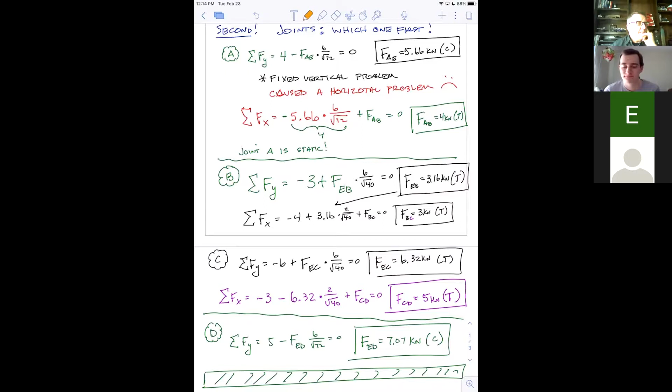In one respect, we're done with this section. You just have to go slow. But we need to practice this. I need to give you more complicated trusses.

There's a couple of things I'm going to show you, like shortcuts. If you have a really complicated truss and you just want to know one member, you don't have to sit there for 5 hours and calculate all of them. Did you see the domino effect happening? There's this cool trick I'll show you in a little while where you can actually just skip over the whole truss and get over to where you were interested, then answer that question and get out. Unbelievable that you can do that.

So I've got a few kind of cool tricks. And of course, there's complicated trusses. There's some really interesting truss shapes that you've also got to contend with as well. What are your thoughts?

I want to stop for a second and just give you a chance to breathe. I'd like to hear from the three of you. Do you feel good about this? Let's make a percentage. 100%? Yeah, I could kind of do this right now. I don't mean you wouldn't make an accidental mistake, but how do you feel about this? Is it working? What about you?

I need to do the problem on my own, spend a decent hour thinking about this on my own. Yeah, well said. Nothing I'm saying doesn't make sense, but go ahead, Ben. Oh, I was saying I feel good about this particular problem. If it was more complicated, then yeah, there might be parts I wouldn't be sure about. How about you, Landon? Yeah, the process seems simple enough, but it definitely seems like it'll take a long time to work through these problems, especially if it gets any more complicated than this.

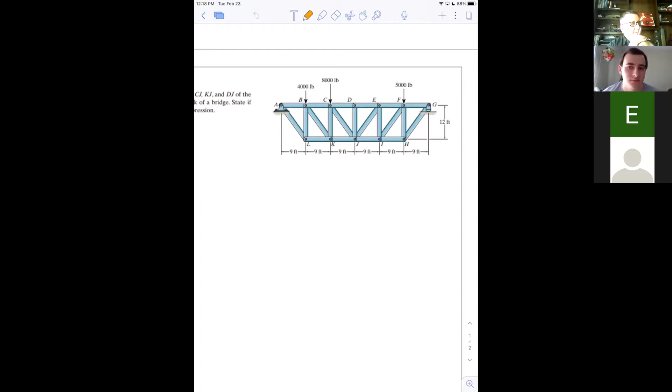But this particular question, because it's actually in your assignment, which is really not fair, says determine the force in members, well, it just lists a few of them. Do you see that? It just says find CD, JC, KJ, and DJ. Just find those, and then you can quit. Your thought should be like, how am I supposed to do that? Because those are out in the middle of the bridge or something. So how do I work my way out there without... I'll show you that. That's kind of a cool trick, a cool shortcut.

We're kind of out of time, but I'll at least want to show you one other picture of something. Let me just show you something cool kind of going out the door.

So I showed you that encyclopedia of trusses, and let me show you my next door neighbor's house that I drew. I drew this house plan.

But I didn't design the trusses. By the way, they have software that does all of this. Notice, why are you in this class right now? It's because of that right there - registered professional engineer. Signed. That's that engineer's stamp. Now I can design a truss, I can do the math. I just showed you that I basically understand the math of it, but I don't have the authority because I don't have the stamp. Do you see what I'm saying? This is what you're after. You're going to stamp your work, which means nobody's checking on you.

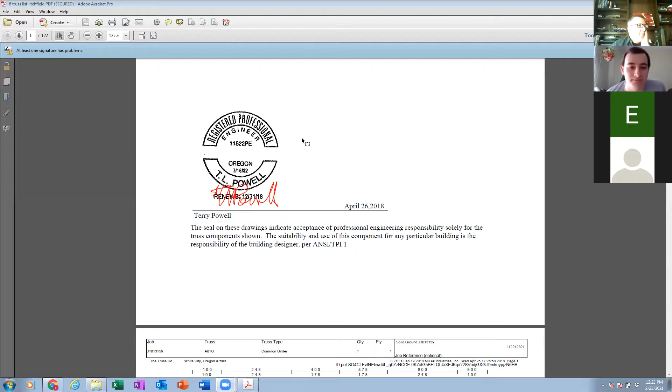This stamp right here that's on this set of drawings - here's what I got from the truss company. This is 2018, as you can see. That stamp right there is the important thing. Doug, Ben, Evold, Landon can do the calculations after this class. Sorry, you don't get to design anything, because you got to be trained. You got to have liability insurance, because just because you know how to do it doesn't mean you're not going to make a mistake. And so that stamp is what you're after as an engineer.

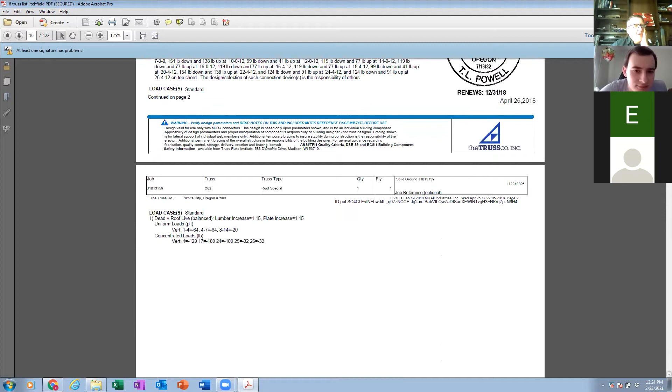But let's just take a look at some of these trusses. I'm going to skip down to, because I looked at this before. Actually, let's not skip them all. Look at that guy - isn't that crazy? That's in the middle of the house. Maybe you can see the size of the cursor over here on the right. There is a lot of trusses in this house, and every one of them is a totally different design. So you thought that problem I just showed you a second ago was hard? You got to do like 50 of those just for one house. You can probably appreciate software's doing this in the world we live in.

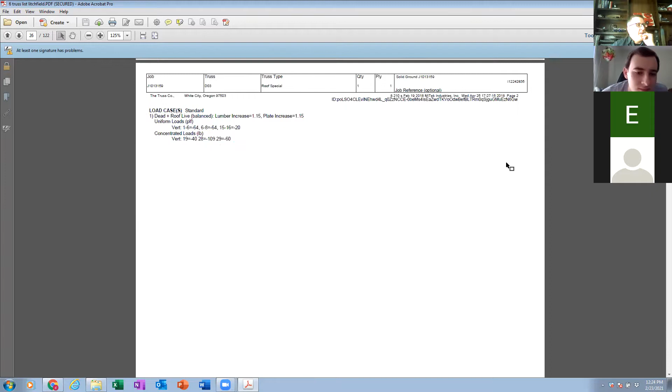But I want to skip down to one really quick before I let you go that is at least understandable. I skipped through all these earlier to find - there's only like one truss in this entire house that isn't weird. Notice that one's also kind of weird shaped. That's like the one that you just saw in your book a minute ago.

But if I get down to D8, hope I'm remembering that right - there you are, D8. There's a nice normal truss. I showed you that one in the Encyclopedia of Trusses a minute ago. I think that was the Howe truss. I forgot, there was Howe and Fink, and I forgot which one. I think it was Howe. That's the Howe truss design. But I want to show you something interesting on this sheet before we go.

As I said, what you don't have here is arrows on it telling you 3 and 6 kilonewtons. You got nothing on it. What do you have? You have this right here. Stare at that - loading. What do you suppose PSF stands for? Pounds per square foot. I told you this before. Top chord live load, 25 pounds per square foot - that's the snow load around here. Top chord dead load, 7 - what's that? Well, that's the roofing. Isn't there stuff on a roof that doesn't move and stuff that's dead, stays there - roofing? And then bottom chord live. Why is there no bottom chord live load?

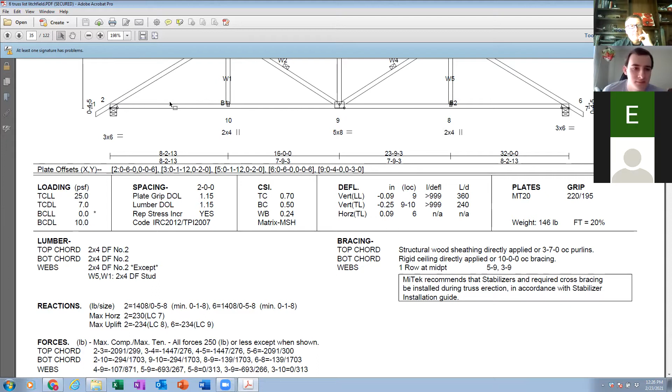This is the bottom chord right here. No bottom chord live load? Well, yeah, nothing ever comes and goes on it. Doesn't snow there, nobody hangs stuff from the ceiling that comes and goes. Unless you stored stuff in the attic, then it would have a live load. But it has a bottom chord dead load, which is 10 pounds per square foot. So can you see that it's these numbers right here that result in arrows all over that truss, at least conceptually, and then you start doing what we just did a second ago?

That's the idea. I want to show you one other quick thing and then we'll shut up here. Notice the next thing down below this is reactions. I want that word to mean something to you so that when you step into this world, you actually know what you're talking about. Notice it says right here, 2, and then it says 1408, and then it says 6, and it says 1408. Where do you see 2 and 6 in that truss up there? Do you see how it's on the two opposite sides? You see how they've named every joint? Here's joint 2, joint 3, joint 4, joint 5, joint 6, joint 8, joint 9, joint 10. There's 10 joints on this truss. And aren't the reactions, because a truss sits on an outside wall, aren't the reactions at 2 and at 6? That's where the wood is that's actually pushing up on the outside of the house.

Notice they've calculated right here that truss is going to put 1,408 pounds on those 2 walls. So as an engineer, or as a guy that draws house plans, I've got to make sure that underneath that is a footing underneath the house that will keep that from sinking into the ground.

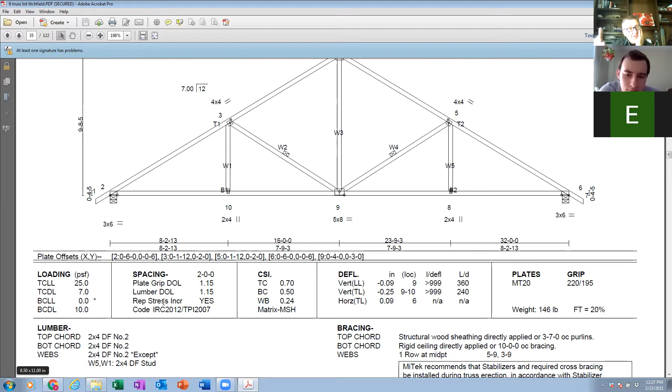So our project at the end of this, I'm going to give you a truss like this and have you make that 1,408 calculation yourself. Think about if this is full of snow that weighs 25 pounds a square foot, and it has 7 pounds of dead load on the top chord and 10 pounds on the bottom chord, how would you turn that into arrows pointing or pulling on each of the joints? That'll be more complicated than the problem we just had, because we're going to have an arrow here and here and here, and there'll be one down there and one down there. There'll be arrows on every single joint.

Fortunately, though, they'll be symmetrical. Whatever's pulling down at joint 2, joint 8 here, will be the same thing that's pulling down over here at joint 10. They'll be symmetrical, so we only have to do half this problem in the real world. Isn't that cool? You're close to being able to do something that makes people a lot of money that is over your head in your house right now. You're able to figure some stuff out that's really cool.

We'll get more on that later on. Anything you want to ask me before we go for the day?

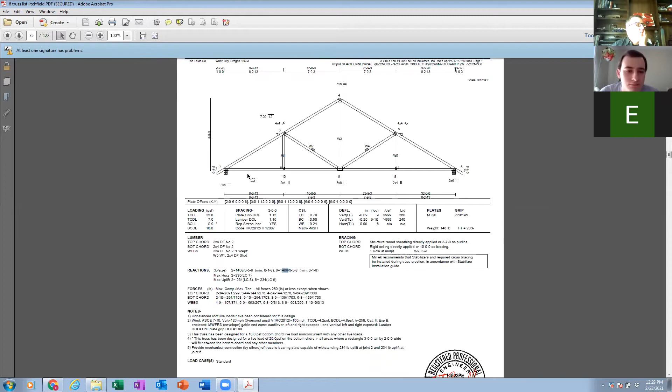By the way, do you notice you don't see any angles on this truss? Right here, you're told that from here to here is 8 foot, that's 8 foot 2 and 13/16. And then you're told from here to here, that's 7 foot 9 and 3/16.

Notice the top row of numbers is cumulative. It goes 8 foot 2 and 13, and then you add 7 foot 9 and you get up to 16. So the overall width of this truss is right there — it's 32 feet wide, a 32 foot wide truss.

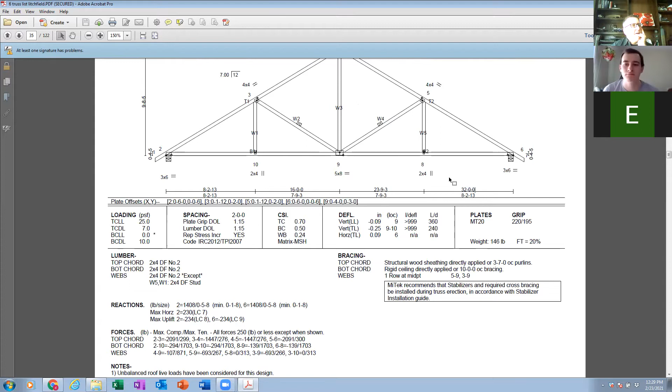And up here you're told that the pitch of that is up 7 and over 12. So if you go up 7 and over 12, that's what the angle of this roof is. There's no degrees on this anywhere — it's all based on proportions, like the problem we just did. So we'll kind of play around with that a little bit as time goes on.

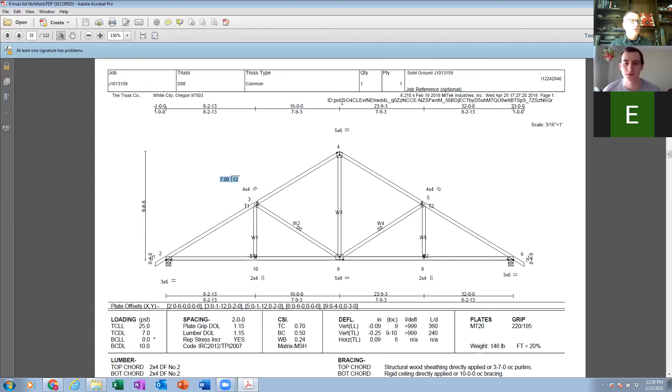All right, thanks Doug, good show. See you guys, bye. Yep. I have a quick question.

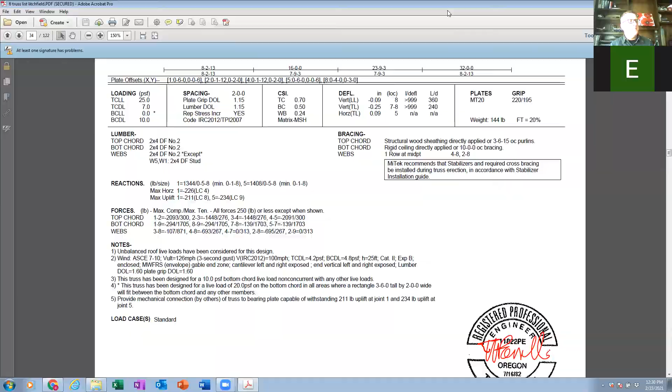When you draw this little plank sitting on the 2 posts, and it's bending under its own weight, is it like the top part of the plank is more compressing and the bottom part of the plank is stretching?

That's exactly right, so that's something we'll talk about later in this class too. The top is under compression and the bottom is under tension. It's the internal structure of the beam that keeps the top from smashing together, which would let the beam fail, or keeps the bottom fibers from tearing apart. So if the beam is not able to resist those 2 forces, top compression and bottom tension, then it will actually fail under that.

So they are stretching — the bottom is getting a little bit longer, and the top is actually compressing and getting a little bit shorter. It's just small enough that the beam is capable of lifting enough that it isn't hurting it, if you will. It's really similar to grabbing my skin and stretching it — it'll stretch to a certain point, but at some point it tears off. So yeah, it's cool stuff.

Pretty cool, pretty cool. So, and you did send us the address we need to be at tomorrow, right? Yes I did, so send me a text if there's anything I missed there. But yeah, I sent you guys everything to find it. Was that on the email, right? Yep, okay, I need to go find it.

All right, thanks Doug. Thank you. Pleasure's mine, we'll see you later. Yep, see ya.